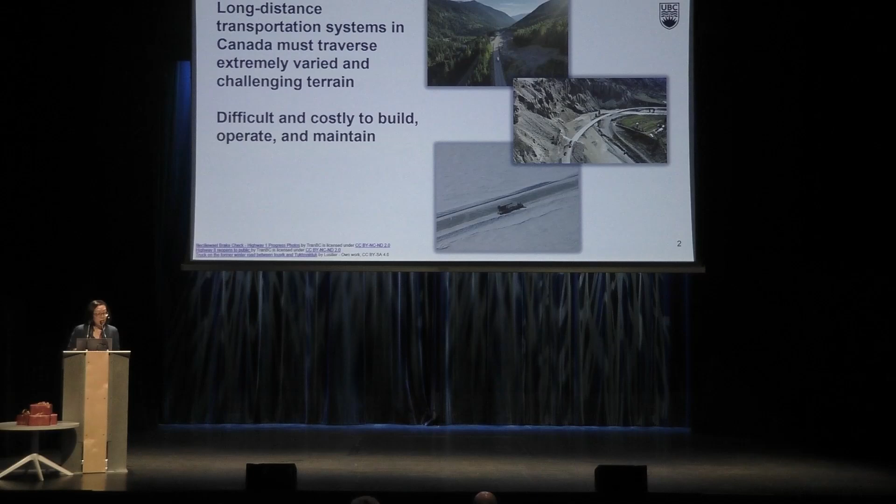And these challenges are even further exacerbated, both in the present and looking to the future. This has really critical implications for our national economy and the health of our communities, with both so heavily reliant on efficient goods movement across these systems.

All modes of the long-distance transportation system in Canada are heavily impacted by climate change. In the Northwest Territories, for example, warming trends are challenging the infrastructure and operations of airports and aviation, marine barging, winter and ice roads, and all-weather roads.

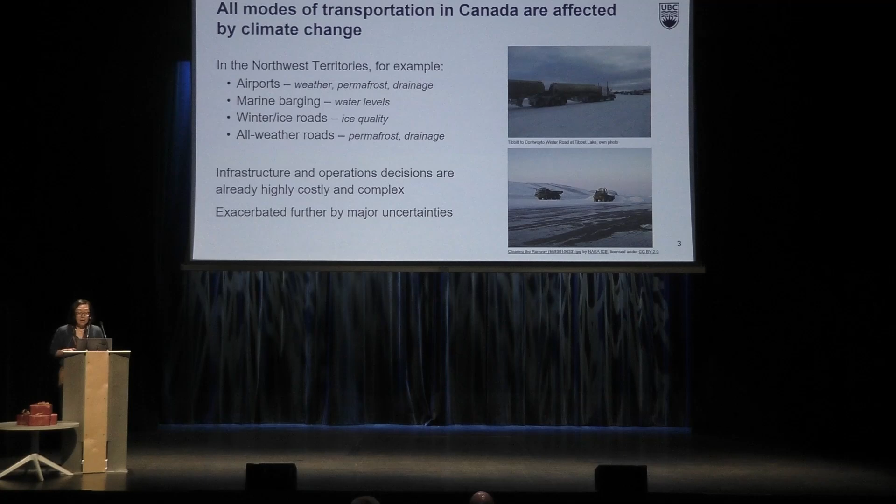Decisions regarding infrastructure and operational investments are already so costly and complex in this very remote part of the world, and they're further exacerbated by major sources of uncertainty, whether that be climate change impacts or world economic and geopolitical forces.

Climate change also means that our long-distance transportation systems are further threatened by natural hazards and extreme events that are increasing in both frequency and severity. In BC, for example, the provincial highway network is impacted by many events, including extreme precipitation and flooding, landslides and snow avalanches, and wildfires.

These events will cause and do cause disruptions to our transportation facilities, which range in impact from minor to catastrophic, and short-term to very, very long-term, sometimes in the range of years.

In BC and Northwest Territories, these transportation facilities are really the lifeline for communities as well as the natural resources economy, while in BC the highway and rail system also connect the largest and third largest ports in this country to the rest of the country.

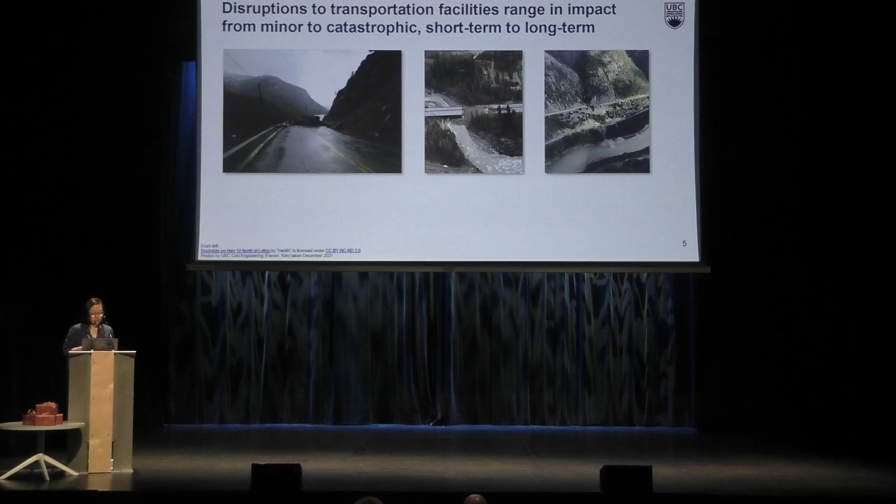So the question for me has been, how has climate change impacted our transportation systems in terms of how they operate and the costs of planning these systems?

Now I'm going to briefly provide an overview of the research I've done in these two places and discuss their relevance to goods movement. These places, the Northwest Territories and British Columbia, are very different contexts with very different challenges and different needs, and that's going to be reflected in the research approaches that I'll discuss.

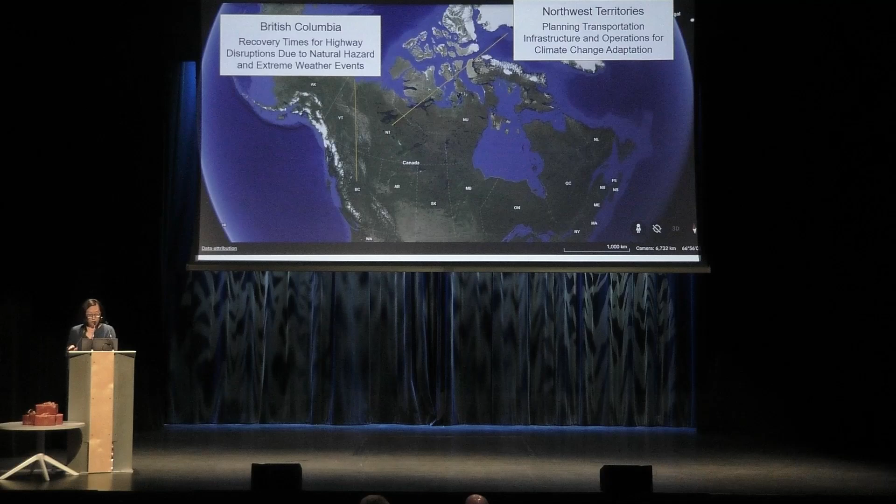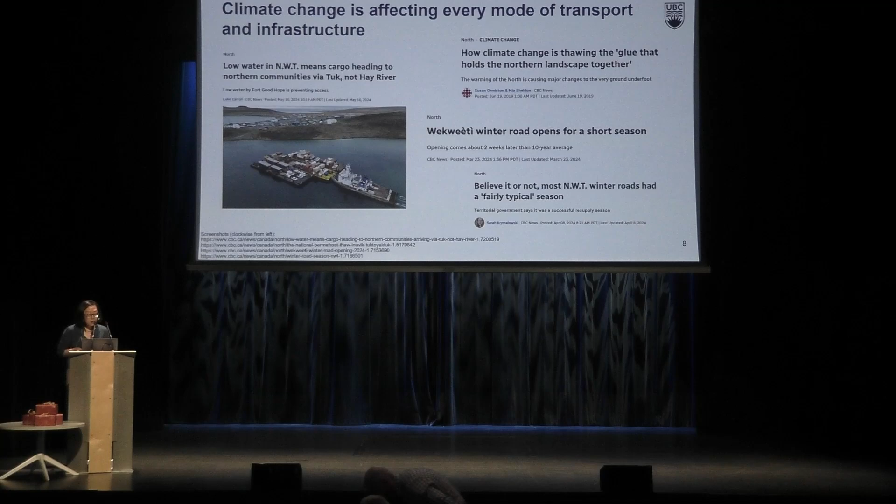So we'll start in the Northwest Territories, where my research group has been studying various transportation systems planning issues over the last decade. Climate change impacts every mode of transport there - not only the trends that come with warming, but also the increased uncertainty around what each winter or summer transport season will bring. Over the last 1.5 decades, the Mackenzie River barging system has been significantly impacted.

This marine freight transportation system operates from the railhead at Hay River, just at the bottom there, across Great Slave Lake, and then down the Mackenzie, northbound into the Beaufort Sea. This goods movement system was historically the most reliable and cheapest summer route to deliver fuel, building supplies, and other essential goods to communities along the river and to coastal communities along the Beaufort Sea.

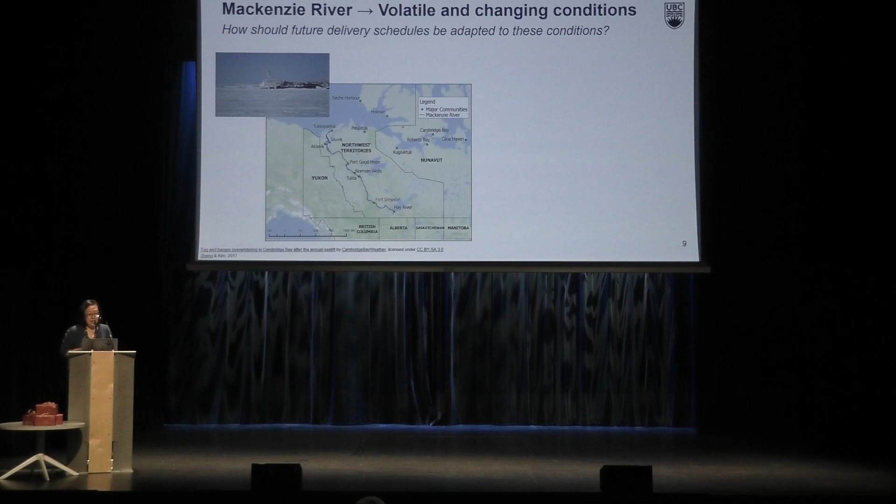Freight moves by barge in the summer and winter roads in the winter. And if not either of these, then by air, which is extremely costly because many communities do not have all-weather road access.

However, the operations have become increasingly unreliable due to changing water conditions, leading to delays, transshipment needs, and non-deliveries for the season. Speaking to one freight company several years ago, they mentioned that many are just choosing not to send by barge any longer, and instead by more expensive trucking from the get-go.

So some of the first work we did was to look at how water levels and thus barging capacity on the Mackenzie has changed, and then investigate strategies to better try to match the delivery schedules of fuel, contracted cargo, and other goods to the changing supply.

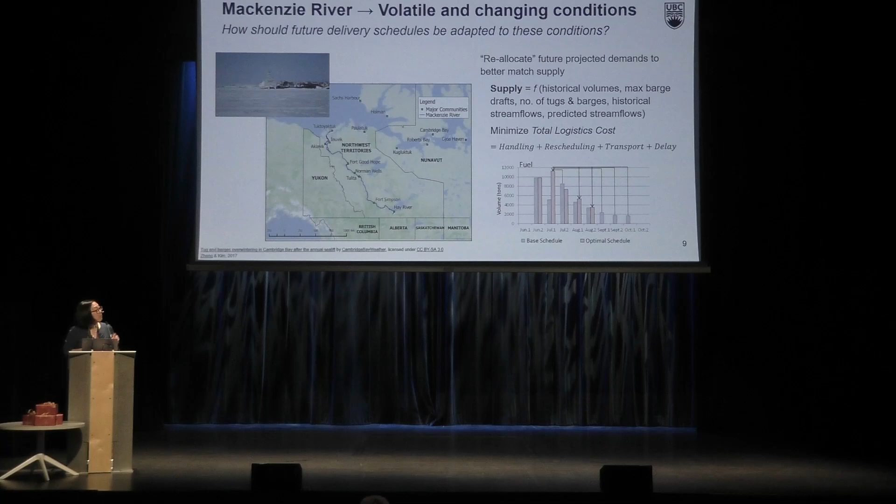But we moved on from this problem to focusing on how to handle the uncertainties brought on by climate change in terms of the environmental and weather conditions, given that transportation capacity seems to be dominated by this.

So in essence, the open season days, the window in which sailing is allowed by the Canadian Coast Guard on the river, have gotten lower and increasingly uncertain. So what we've done is used a financial options model showing that the expected costs in forecast years are much higher than the historical costs have been.

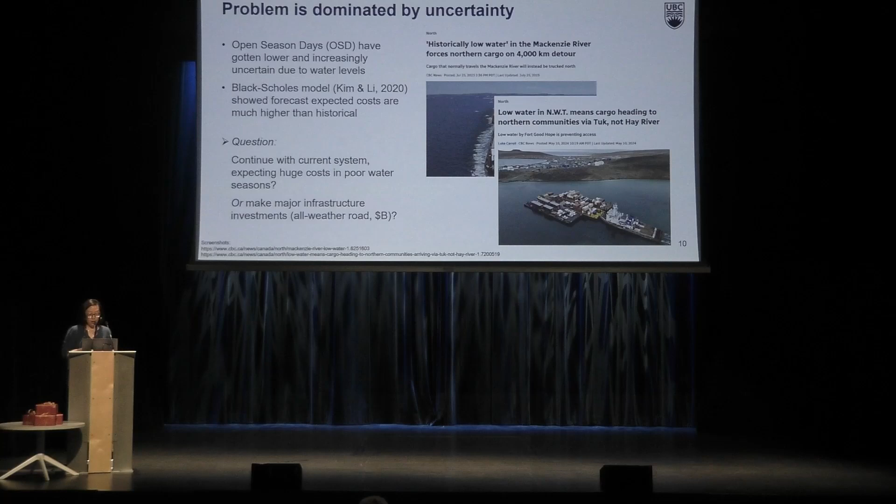This led us to our next question. Do we continue with this current system knowing that there may be huge costs in bad water seasons, also combined with poor winter road seasons, short winter road seasons, or do you make big investments to build the all-weather Mackenzie Valley Highway? And if so, when does this decision need to be made, or can there be some flexibility in when this decision is made, like a wait-and-see approach?

So we used a technique called real options analysis. It comes from the world of financial modeling to study the problem.

And we looked at the 4 construction project phases for the Mackenzie Valley Highway identified by the government of the Northwest Territories, with results leading to the staging in the order of phase 2, then 1, then 3, and 4.

So I'll make two notes about this that I think are interesting. First, these results recommend flexibility. They're not saying you have to build in this year. It's more that you want to wait and see until the year's shown, because conditions are going to change, and the model allows us to take that into account.

Secondly, the phasing actually follows what the GNWT did and has done for the Mackenzie Valley Highway. Around 21 kilometers of road has been constructed since 2018 as parts of phase 1 and 2, and there are no plans to build phase 4, which our results also support. This really has to do with the enormous costs.

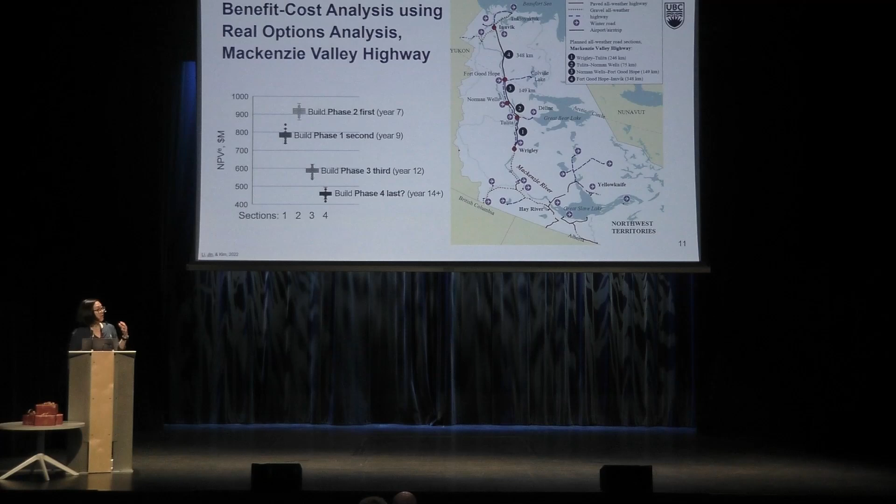Ultimately, what this work does is confirm that all-weather roads in remote areas of Canada that support both passenger and goods movement and economic development can be really difficult to justify using traditional benefit-cost analysis approaches. Our results show that the benefits of all-weather road building may be higher than the results you would see by these traditional benefit-cost analyses.

The traditional BCA doesn't consider uncertainties and the ability to be flexible about these decisions about when to invest. We show that the value of uncertainty, even if in some cases it doesn't result in a positive net present value now, it may do so in the future.

And just to close this, I found a recent study by the Financial Accountability Office in Ontario, which states the following. First, that costing climate impacts to public infrastructure over the long term is subject to significant uncertainty. That seems fairly obvious. Secondly, adapting public transportation infrastructure to withstand these climate hazards will cost less than not adapting at all over the long term.

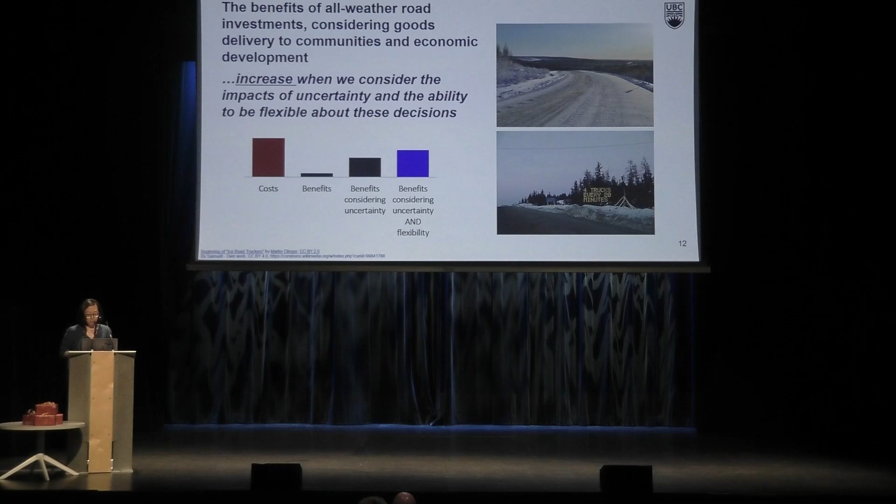All right, so that was a very, very quick encapsulation of some of the work that we've done over the last decade or so.

So next we move on to BC, and we're going to look at a very different problem here, which is the problem of disruptions.

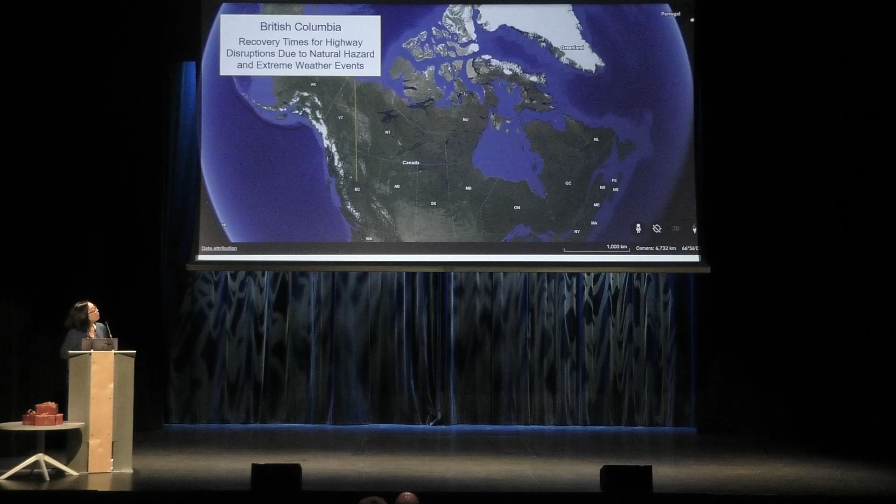So perhaps you can recall a disruption, a highway disruption that occurred near where you live or while you were traveling. And then, of course, others will have had experiences with different ones. We've had lots of experience with highway disruptions over the years, disruptions, delays, and so forth.

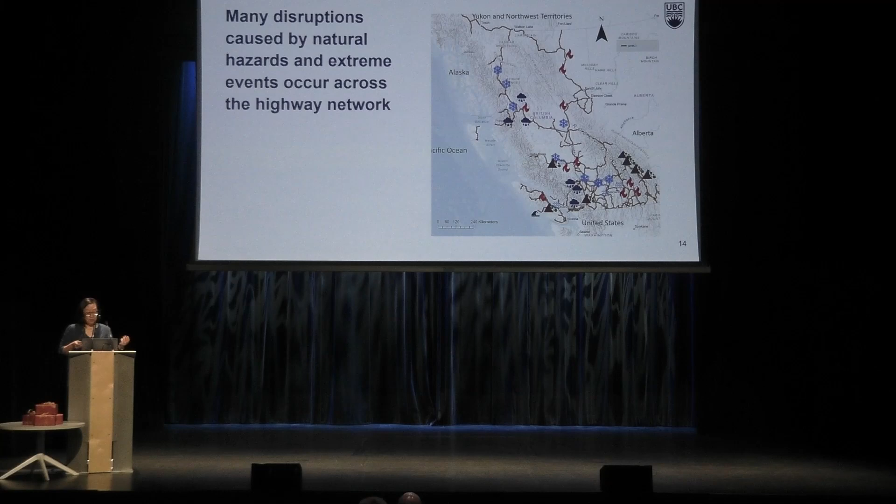There are many disruptions that occur across any highway network over some period of time. But if you're in an agency like the BC Ministry of Transportation and Transit, you want a system perspective to know what is going on across the entire system, not just individual experiences. And they want to know this in order to make decisions to improve infrastructure resilience. This is particularly important when these decisions are really expensive and resources are limited to handle what are growing problems that affect entire communities and even the national supply chain. However, the data to study this is scarce, or of very low quality and coverage.

So we turn to a rich and entirely open archived data source called DriveBC, which you may be familiar with. It's also called 511 in several other provinces and many states. 511, if you don't know of it, is a traveler information system, and the purpose is to provide travelers with information about the location and nature of any problems or issues of note on the highway system so that travelers can plan their trips accordingly.

So we use this data set, and I won't drag you through the pain of the two plus years of investigating, cleaning, searching, and structuring this data for our use. It was a messy and complex procedure. But the main thing is that we were able to answer the question of whether the data could be used to answer some interesting questions about the highway system.

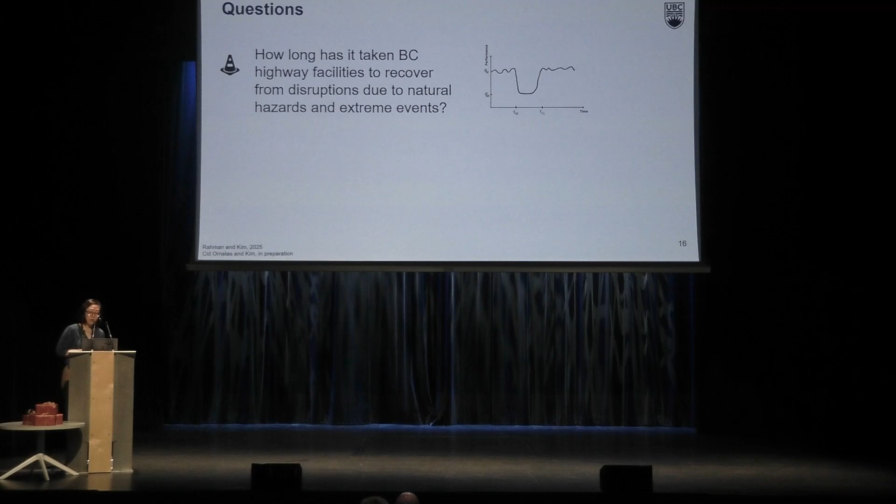The first question is, how long has it taken BC highway facilities to recover from disruptions due to natural hazards and extreme events? And secondly, what key factors have influenced recovery times? To answer these questions, we used a statistical modeling approach called a hazard duration model, and I'll briefly show you some of the main results.

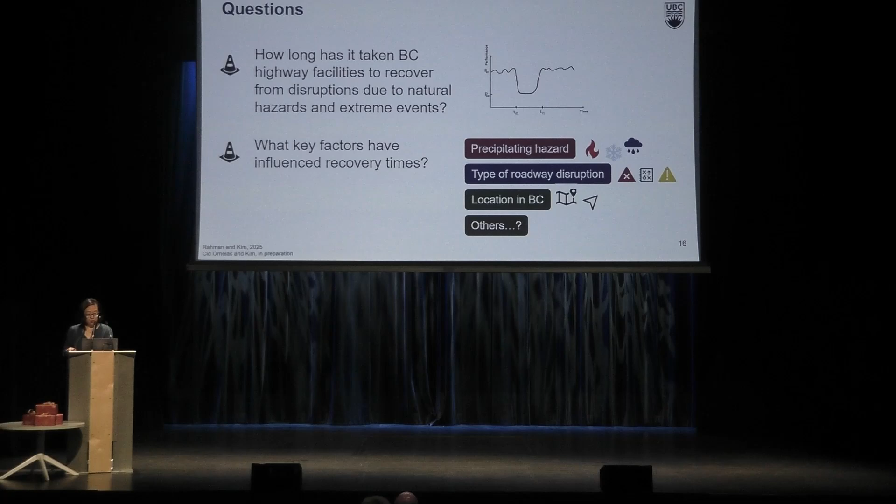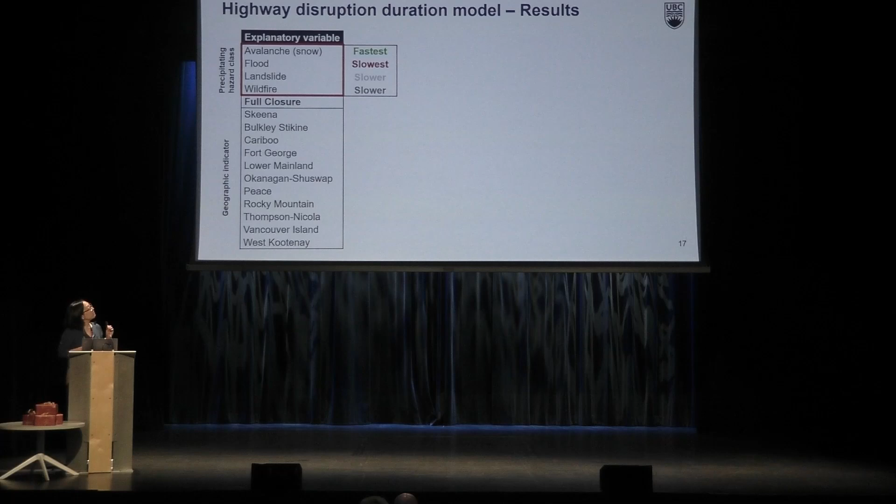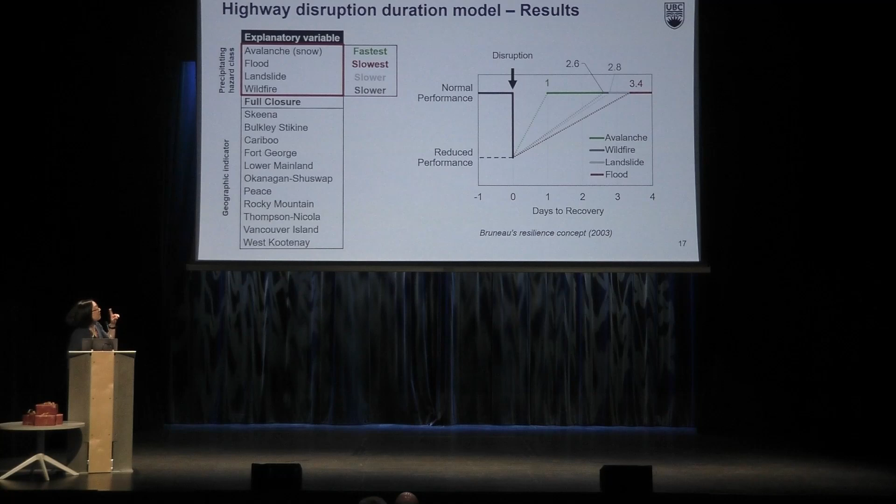We set up three classes of explanatory variables, and first, we looked at highway recovery from four classes of events. We found that the avalanche category of precipitating event is fastest to recover, while recovery from flooding events takes on average the longest, with landslides and wildfire in the middle. This figure on the right shows the relative highway recovery rates in the form of a resilience triangle, a well-known concept in the literature. So what it shows is that if, for instance, an average disruption due to avalanche recovers in a day, then it's going to take around 3 or more days to recover from the other types of precipitating event classes.

Second, we looked at the type of closure and disruption. We found that events leading to full closures took longer to recover compared to those without full closures - 1.2 days for full closure for every 1 day for non-full closure disruption. This was a little different from the descriptive analysis we had, which showed that it was actually about twice as long. So somewhere from 1.2 to twice as long.

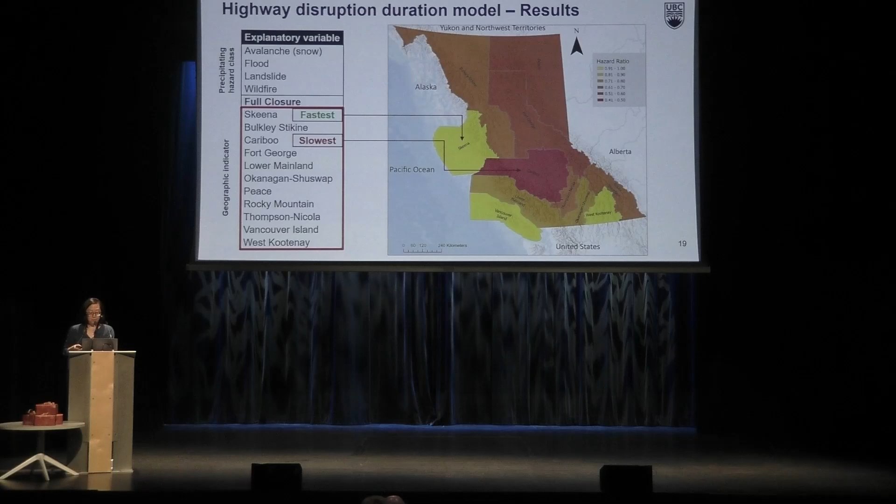Third, we found that highway disruption recovery also differs across the province depending on where you are. Very generally, recovery takes longer as you go further north. In fact, we tested several different variables that represent this geographic influence, and broadly found that as highway density and usually population density increases, recovery is faster. When disruptions occur further north, or when air temperatures are lower - which could be further north, or in the winter versus summer - recovery also tends to be slower.

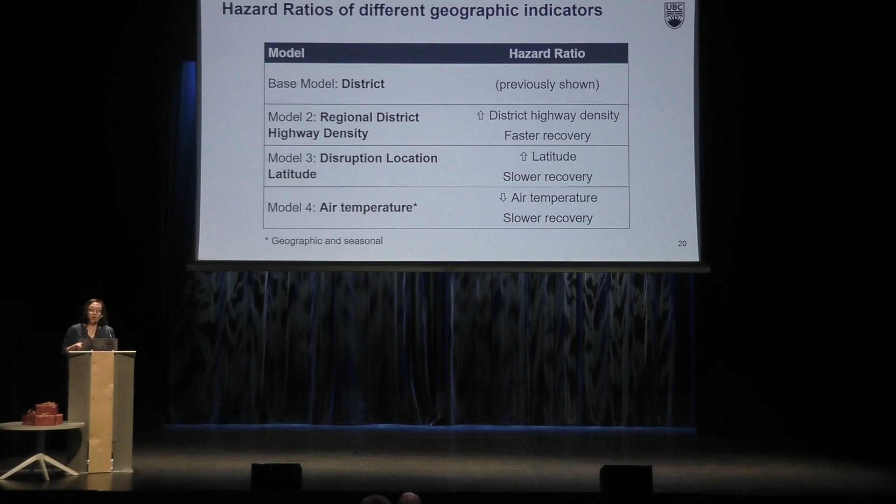Basically, this means that in parts of the province that are more remote with lower populations, recovery tends to be slower, and this makes sense because in more remote places, it'll take longer to identify a disrupted location. It will take longer to get resources from a maintenance yard to fix that disruption or address it, and possibly there's less urgency because of the remoteness. But in terms of the major goods movement corridors like Highway 1, Coquihalla, Highway 16, recovery appears to be faster and further helped by corridor improvement projects.

So this work is really a starting point to then further investigate locations with historically slow recovery. And what we want to do is combine this work with network hazard and criticality maps being done by some states and provinces, to determine where corridors important to goods movement are, and to inform infrastructure and investment decisions that improve resilience and protect major corridors important to our economy.

So that's all I had for today. Thank you.

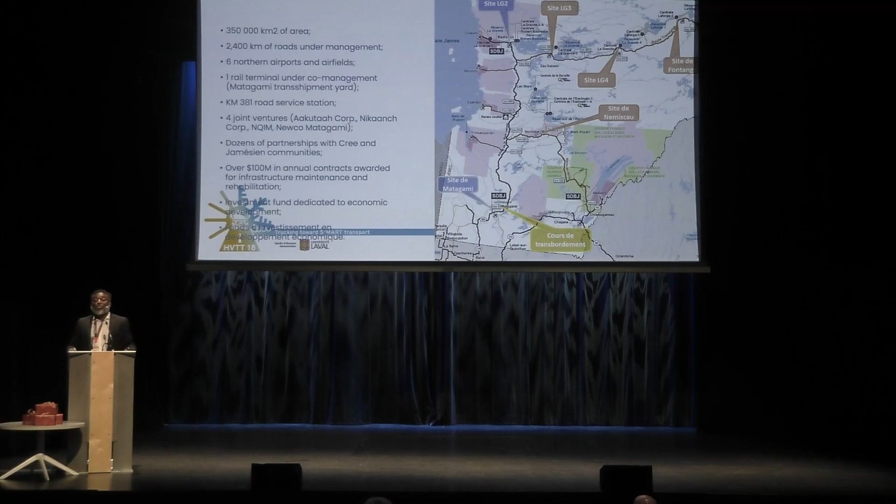We also have dozens of partnerships with Cree people, and we have 4 joint ventures with the Cree. Two of those joint ventures are very important for us: Aakutaah and Nikaanch, which is the company that manages airports in the north. So we are very connected with the people in the territory, principally with the First Nations.

We are a government of Quebec agency, a non-budgetary organization. So if you want us to do something, you have to pay - we have no budget coming from the government. We are dedicated to the economic development of our intervention territory. And what is very important is that we hold the status of mandatory of the state and signatory of the James Bay and Northern Quebec Agreement. This is very important.

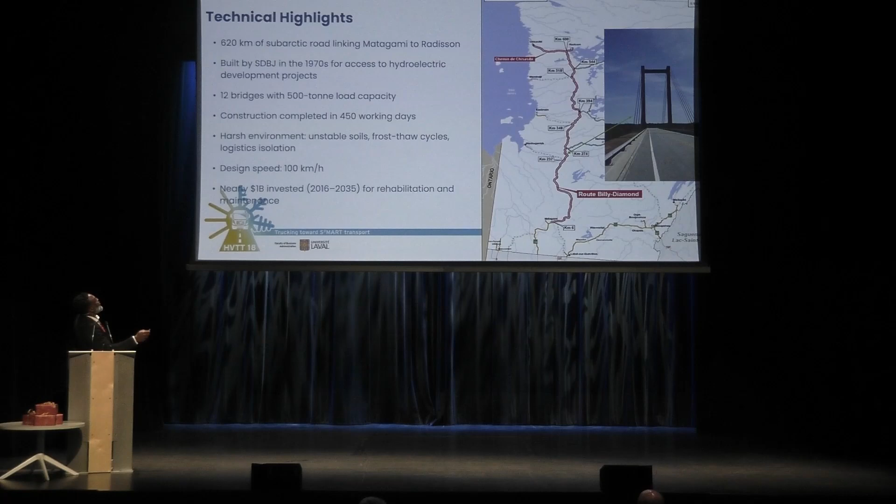Let us talk about this exceptional infrastructure. I'm going to give you some technical highlights: 620 kilometers of subarctic road linking Matagami and Radisson, with 12 bridges built to support a capacity of 500 tons. One of those bridges, very interesting, is Rupert Bridge at kilometer 257. The design speed is 100 kilometers per hour, normally used on highways in Quebec. But this road is not a highway - because it's isolated, it's still 100 kilometers per hour.

Since 2016, we started a reflection project on that road, and by 2035 we will have invested nearly $1 billion for rehabilitation and maintenance.

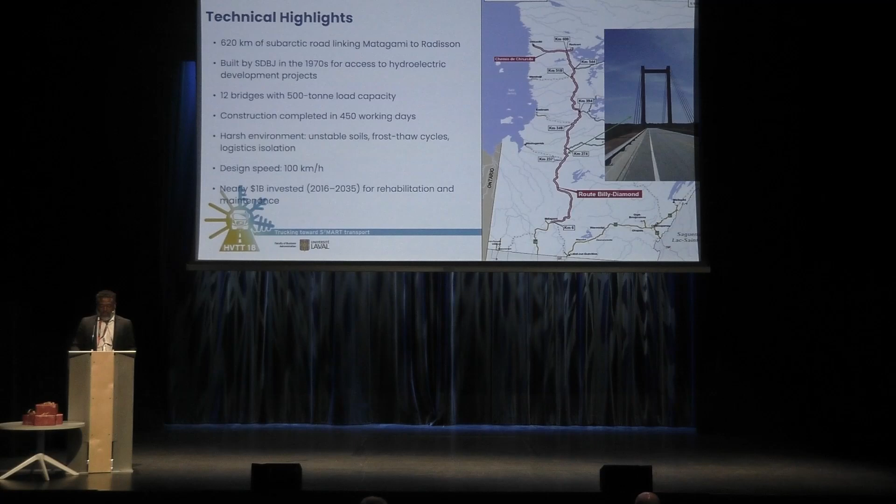It's a unique case in the north, a strategic infrastructure built on public lands under Quebec's Ministry of Natural Resources and Forest. That road provides access to hydroelectric power plants - there are many in the north. Most of the electricity in Quebec comes from James Bay. That road also provides access to all the communities on the coast of James Bay - this is a piece coming from Chisasibi, one of the important communities in the north - and provides access to La Grande Rivière Airport, the only northern airport accessed by road in northern Quebec.

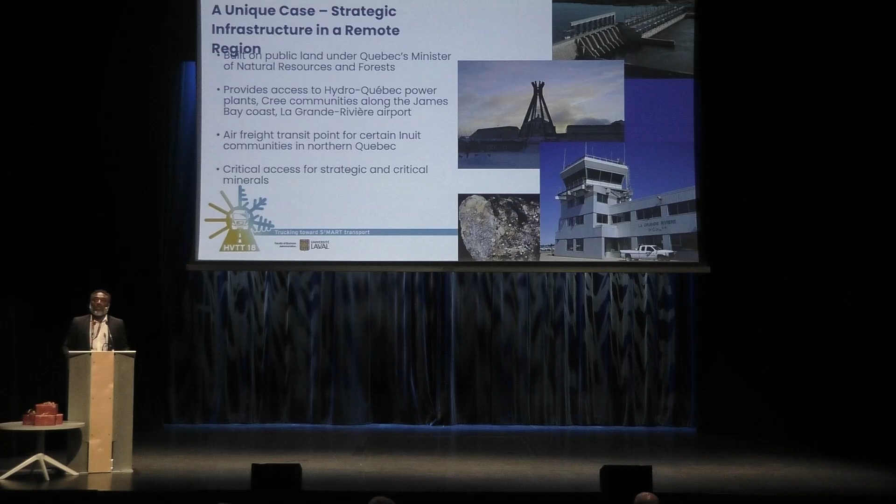Recently, we found out that Billy Diamond Highway is a very important tool for critical access to strategic and critical minerals - this is lithium. We have 78% of Quebec's lithium based in James Bay, so all the mining companies that are going to explore lithium are going to use Billy Diamond Highway.

So we have some challenges with unstable clay soil and glacial till, and freeze-thaw cycles. And you understand, because you have many trucks, very loud, we need to maintain minimum service levels while ensuring safety. It's essential to preserve this strategic asset.

We also have climatic constraints. You recently heard about forest fires in James Bay - that was very terrible in 2023, everything was closed, the city was closed. We have to face that situation. And we also have increased precipitation - sometimes we lose culverts because of the huge rain.

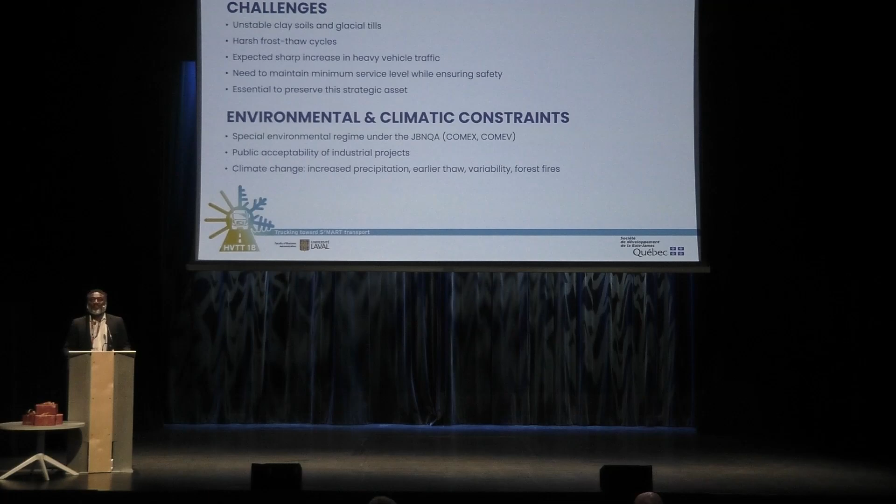So how do we manage the heavy load? We have to adapt our strategy because there's no regulation to control the heavy load on Billy Diamond Highway. No legal framework historically existed for load limits during thaw.

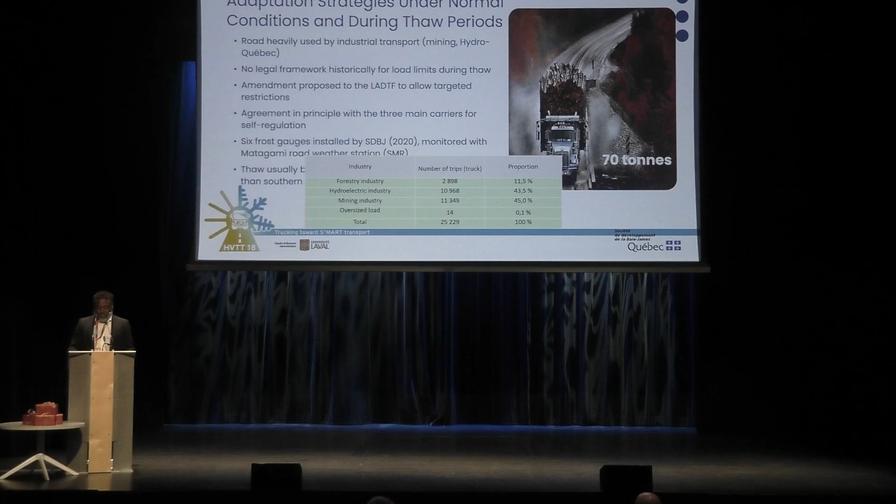For that reason, we installed 6 frost gauges in 2020 to monitor the thaw period and know exactly when it starts and finishes. Thaw usually begins in April and lasts 2 weeks longer than the southern zone 3.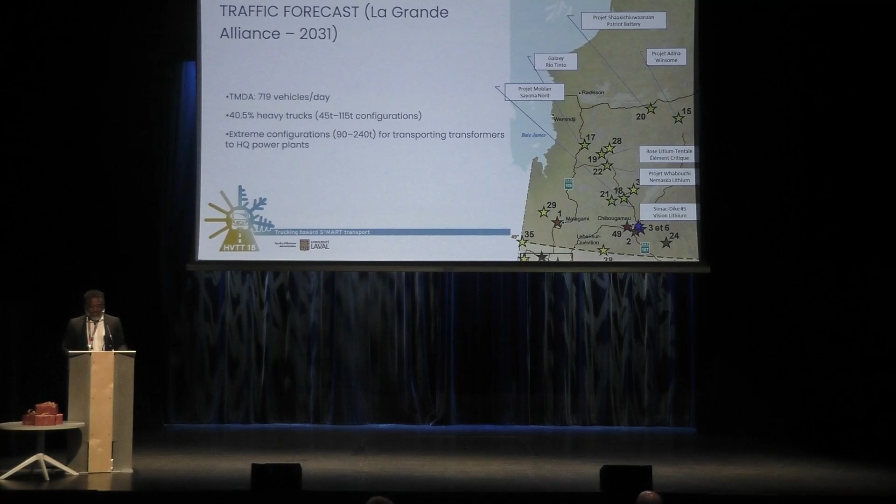A unique regulatory statute: Billy Diamond is a multi-use road under the Sustainable Forest Development Act and its regulations. Only some articles of the Highway Safety Code apply. Article 621 concerning weight regulation does not apply, so every year you can do whatever you want. There's no limitation, but the capacity of bridges is 500 tons.

But there is a regulation in Quebec for that part, so all the transporters have to ask for a permit before coming onto the bridges on Billy Diamond Highway.

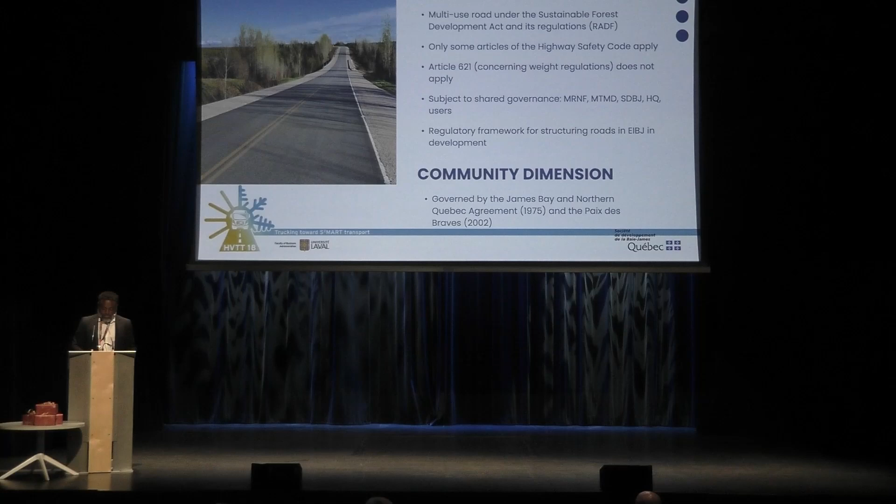Hybrid funding model is very special because normally there is no fund to take care of Billy Diamond Highway. For maintenance, the government provides funding with Hydro-Quebec, because Hydro-Quebec needs Billy Diamond Highway to reach their power plant.

For the rehabilitation project, we found funding from the federal and provincial governments, and we also use Quebec's infrastructure plan, so we have to ask every time. There's no room to just go take funding to take care of Billy Diamond Highway -- we have to go look after money every year.

Strategic corridor for northern Canada. This map is very interesting. Do you remember when I told you about La Grande Alliance? There are two huge projects coming -- I don't know when, but the study is already done. In La Grande Alliance, we are looking to build a deep water port project in Whapmagoostui and to extend Billy Diamond Highway from Radisson to Whapmagoostui.

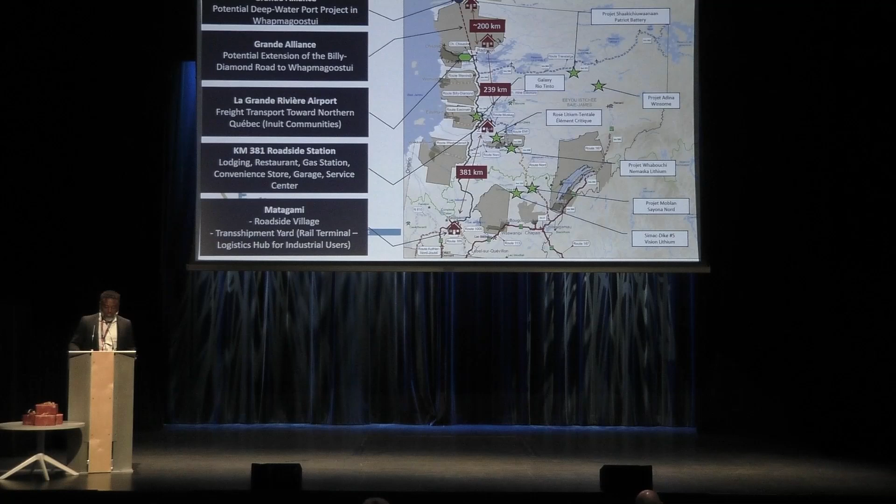For regional integration, Billy Diamond Highway connects 9 communities and several industrial hubs, as part of La Grande Alliance, as I said.

To finish today: autonomous vehicle testing opportunity on Billy Diamond Highway. Why? It's a possibility -- there's low traffic, an ideal test environment, a long linear road, few intersections, extreme conditions, a northern corridor for smart transport innovation. So we are open to any test that the transportation industry wants to do.

So thank you very much. That was a little bit tough.

Thank you so much, Emil. I think you are being very hard on yourself -- it was fine, it was all good. It was very interesting, thank you so much for this talk. Does anyone have a question for Emil? We have a little bit of time.

I would have plenty, but I will just make one. Before that, Emil, you are almost among friends because most of us, English is not our first language. Okay, mine is Spanish to start with. So very interesting, and again, like with Amy, it resonates a lot with what I do.

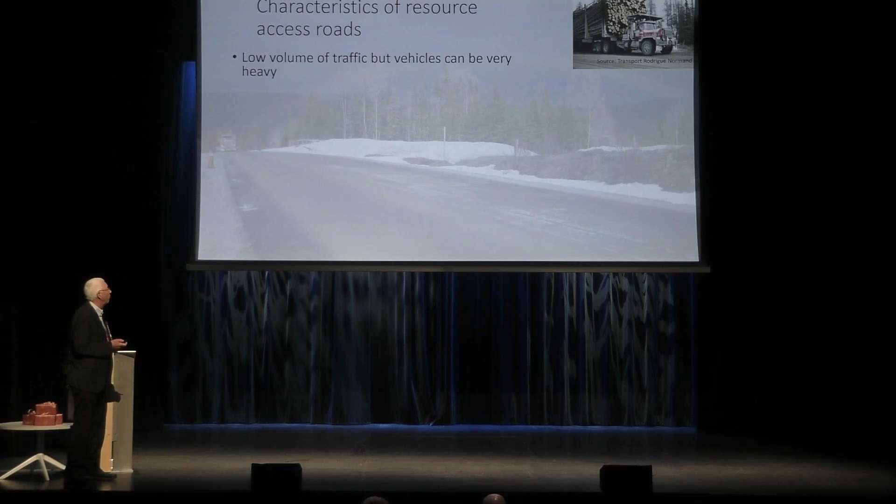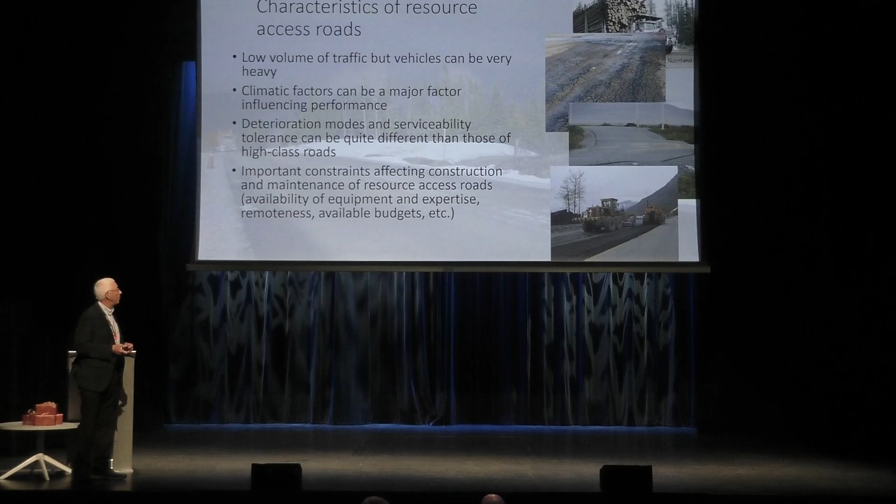Climatic factors are a major factor in the performance of these roads. The deterioration modes and also the serviceability level or tolerance we have for different types of distresses vary considerably for these roads compared to normal highways. And there's lots of constraints affecting construction, maintenance of resource access roads: availability of equipment, expertise, and the remoteness is a huge challenge.

Availability, budget, etc. So the main challenges when you're building a road - not the only ones, but some of the main ones - you need to fully understand the characteristics of the physical and climate environment of your road. You need to design embankments and pavements to provide adequate bearing capacity given generally low volume of traffic and uniform performance along the road. You need to find good quality aggregate, organize extraction and transportation for the road construction. You need to organize construction logistics, and in some cases it's really a major challenge. And then you need to maintain that road to optimize its operational capacity.

Looking at each one of these challenges - understanding the physical and climate environment of your road is, of course, a key factor to start with. The roads again are long linear structures, and by definition they'll cross all sorts of types of soil, climate, and environments. So you can go from forested lowland moist soil to highland taiga-type forest, low and in relatively dry conditions. It varies along the road, of course, with different types of soils.

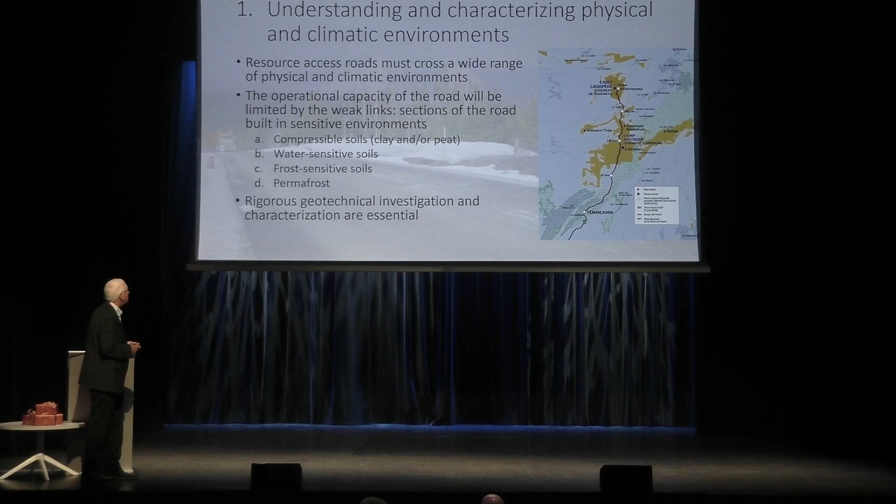The operational capacity of the road will be essentially limited to the weak links of the road. So any sensitive area along the road will dictate the capacity of the road. Among the sensitive areas that we can have along a road, we can consider compressible soils, like clay and peat. We can also consider water-sensitive soils - soils that are very sensitive to variation in moisture content - frost-sensitive soils, and permafrost.

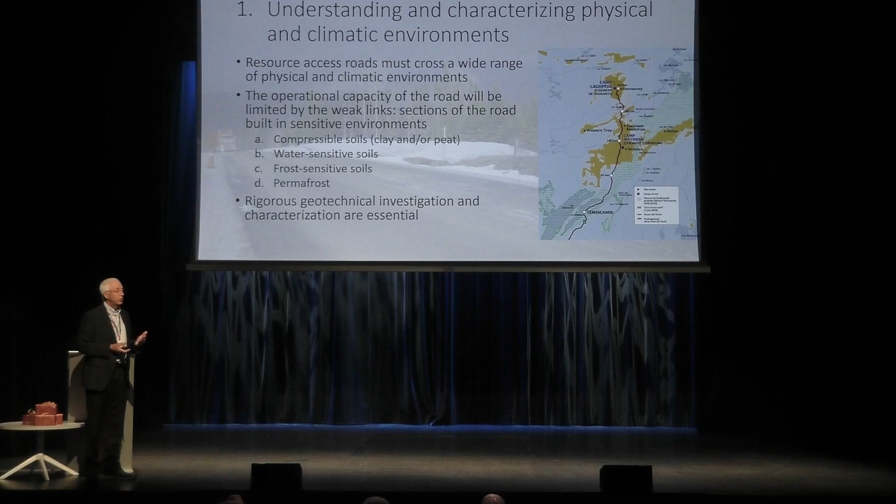You have to keep in mind that most resources currently that are attractive and that people would like to access are in the north, and 50% of the land area of Canada is actually characterized by the presence of permafrost. So permafrost now is a major concern when you're building - for example, the extension of the Billy Diamond Road will be in a permafrost area, so this has to be considered. Of course, one of the key aspects is you need to have good geotechnical information on the road corridor.

So, looking at this type of problem, like compressible soil, you can have peats and clays that are compressible, and they're very widespread in the north. So it's a common problem to have these compressible soils.

Significant settlement is to be expected in those conditions, and you need to manage the consolidation of those soils. So you need to manage the drainage of water, because consolidation involves expulsion of pore water. So you need to drain that water. You also need to manage the pore pressure inside the soil, which can lead to instability.

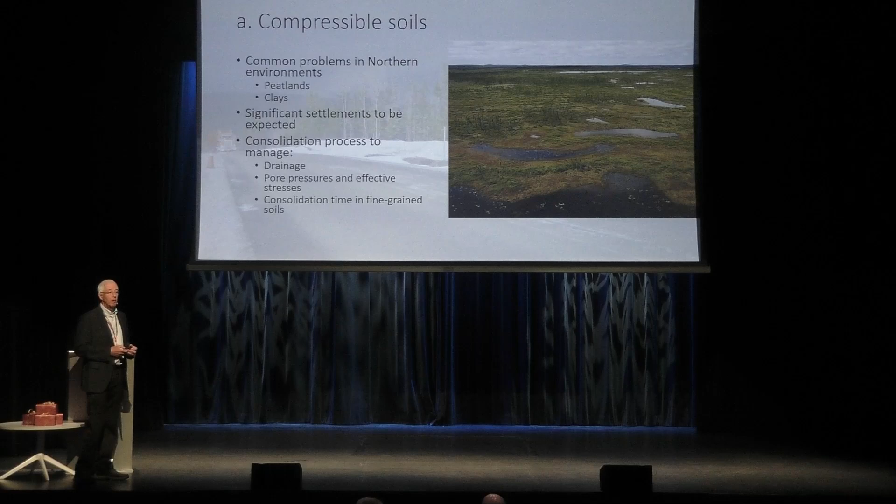You also need to consider the time for the consolidation process. So if you're in fine-grained soil like clay, it's going to take very long periods, that can be a year and even more, to fully consolidate the soil. So in the meantime, you're going to have to manage settlement and movement of the road.

In order to mitigate those problems, for clays, the basic principle is to force consolidation of the clays prior to operating the road. You can do that using surcharge or other techniques. You can also use reinforcements at the base of the embankment to help stabilize it. Or you could use lightweight material, like, for instance, if you're in a forestry harvesting area, you could use wood chip as an embankment material to minimize settlement.

For peat, excavation is an option if the deposit is thin and if you're not in a permafrost environment, because peat is an extremely important protective layer for permafrost, so you don't want to remove it. But in seasonal frost areas, if the layer is thin, you should remove it. If it's thick, then you should consider consolidation with or without reinforcement at the base of the embankment. Another option is to displace the peat using a special construction method to force it to move laterally and reach the mineral soil underneath.

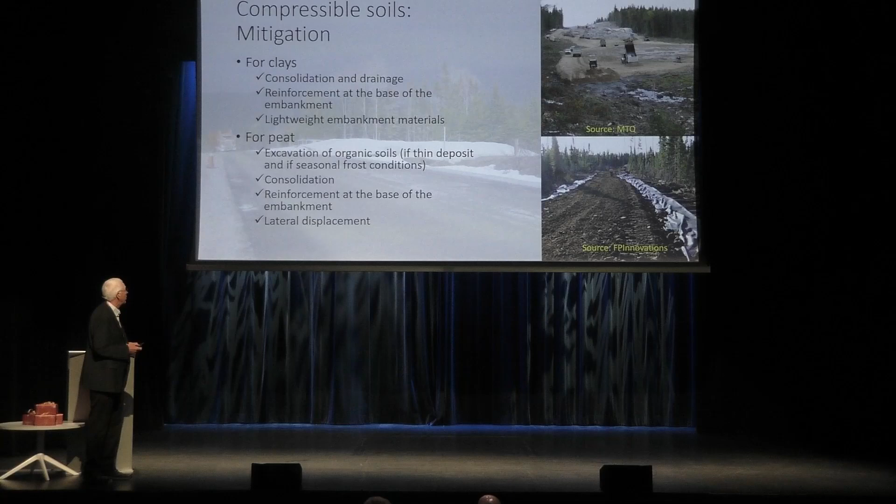Water-sensitive soil is also an important problem when you have fine-grained soil. It can cause significant problems during construction and operation of the road, and the problem is strongly exacerbated during thawing periods, whether you're in seasonal frost or permafrost conditions. If soil is thawing, you're going to have excess water and lots of problems with bearing capacity.

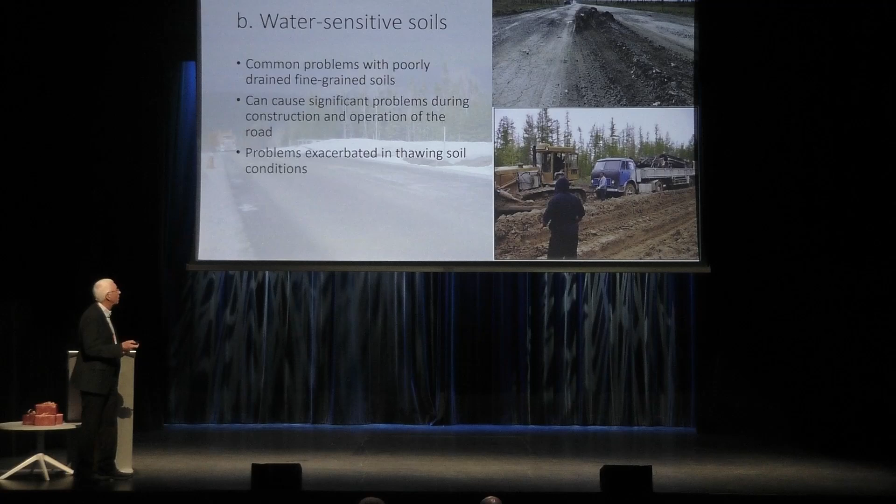The solution, or some of the key solutions, is to use good quality material first - good, free-draining gravel for the pavement and also the embankment. Good preparation of the subgrade soil: compaction, and making sure that the surface of the soil drains freely towards the ditch. Adequate drainage to remove water away from the platform. You can also use drainage composites, and chemical stabilization is another option to reduce the sensitivity to water and moisture. Frost-sensitive soil is a problem associated with the water sensitivity of the soil.

In Canada, most roads are affected to some degree by frost action. The problem can cause heave and distortion of the road surface, can be a significant problem for winter operation of the road, can cause cracks to the surface, and also causes significant bearing capacity loss during spring thaw. This problem is likely to affect the functional and structural capacity of the road during its operation.

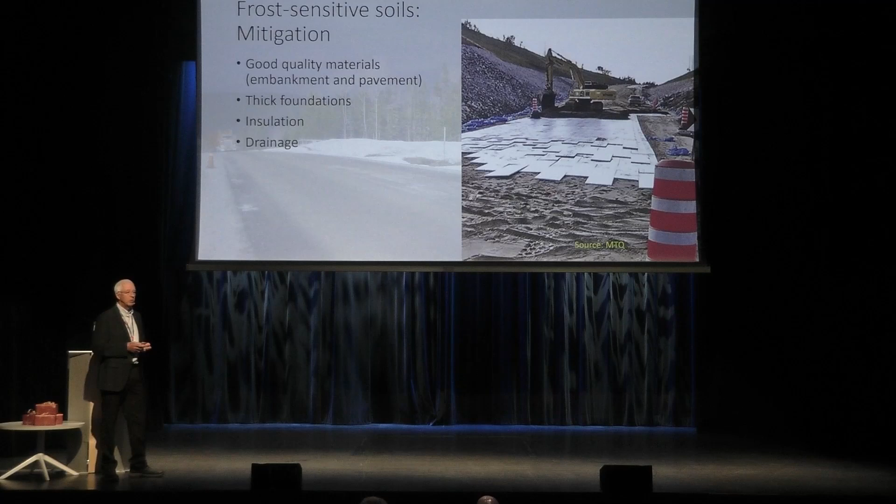Construction in permafrost conditions, again, as I said, is a widespread problem in the north of Canada. Permafrost is perennially frozen ground, soil. It's a physical environment that's in a very fragile equilibrium with the environment, and mainly with climate. So it will be stable if climate is stable, if nothing happens.

The picture on the right shows a cut in permafrost soil, an exposure created by a landslide. You can see ice wedges near the top—these are massive ice structures in the ground. I won't go into the detail of their formation, but just below the ice wedge you see ice lenses. That soil has somewhere between 60 to 70% ice content.

So as long as this is frozen, it's stable. But if it warms up, the properties change quite drastically, and if it thaws it can cause severe problems. The soil becomes extremely unstable, and that can be caused by site disturbance—if you build something on top, you disturb the surface and change the equilibrium, causing severe problems. It can also be caused by climate change, which is happening at a very fast rate in the north.

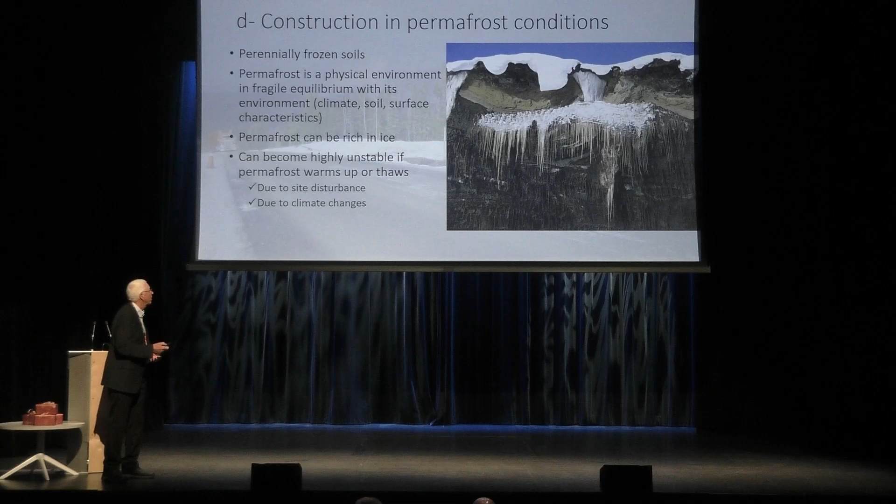Thaw settlement, differential thaw settlement, is a very common problem everywhere in the north where permafrost exists. And again, that's a management nightmare.

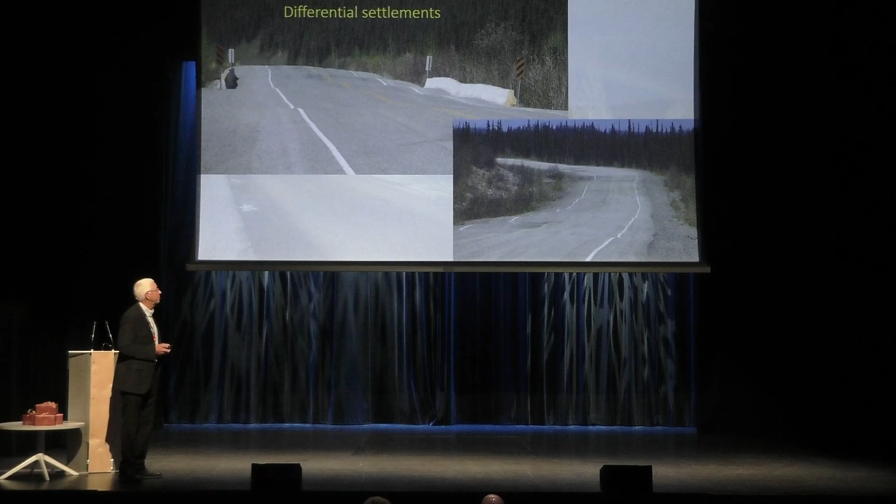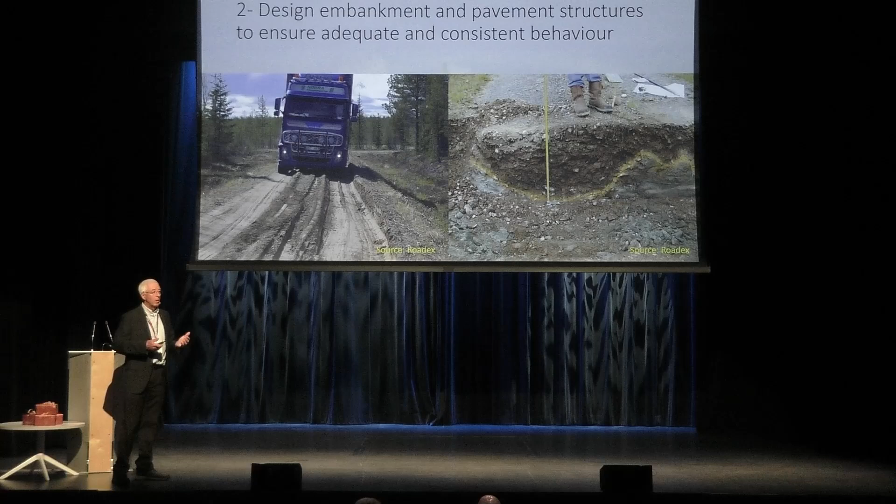The design of the embankment—you want to ensure adequate performance considering very heavy traffic. Again, we're dealing with a structure using several layers of gravel.

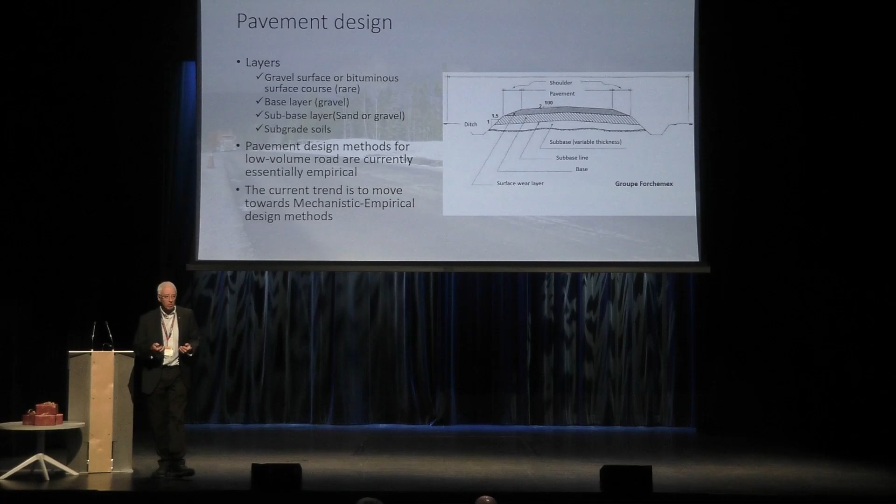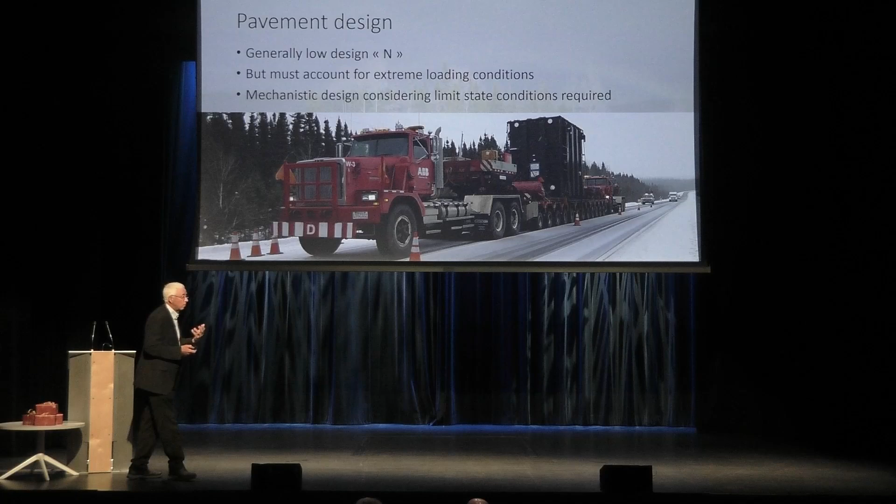Currently, the design methods for low volume roads, including resource access roads, are essentially empirical, and in some cases just rule of thumb—there's not much technology involved in pavement design for resource access roads. The current trend is to use a mechanistic empirical technique, calculating stresses and strains and comparing them to allowable values. In pavement design, you use the factor N, the number of load applications expected during the lifetime of the road, and that value is very low for resource access roads. This typically leads to minimum thickness, but you also need to account for extreme loading conditions and consider limit state analysis of your system.

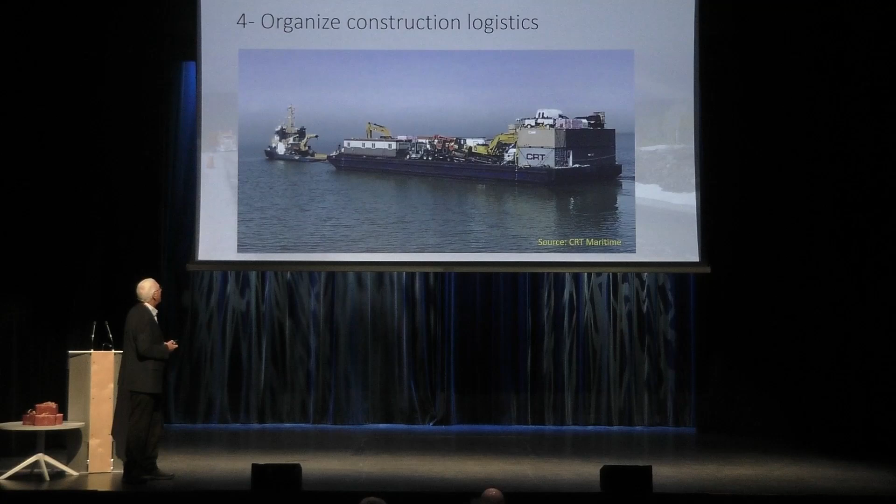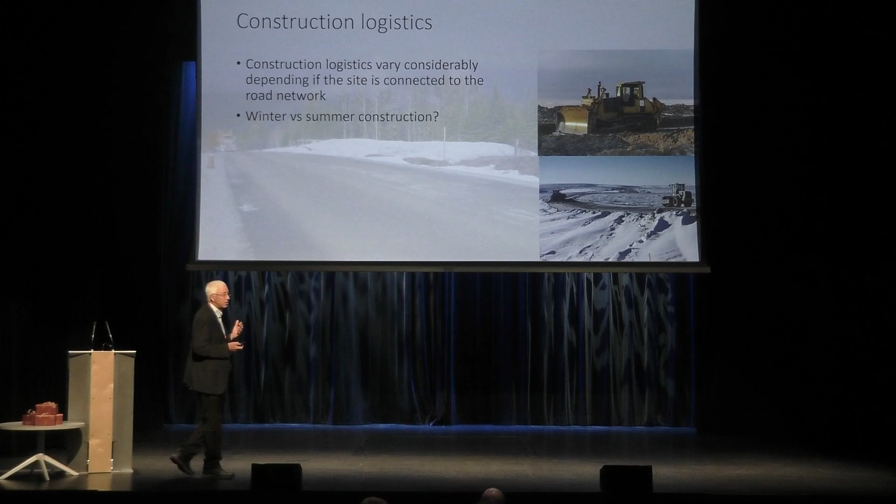Construction logistics are very complicated in the north, especially if you're not connected to a road network. If you're at the end of the road network, like the Billy Diamond Road which is connected to the network, it's relatively easy to mobilize equipment, but if you're not, it becomes extremely difficult. I have to consider winter construction versus summer construction. Both have advantages. Winter construction allows you to travel easily on the surface, but conditions can be pretty bad. In the summer, it's difficult to work, but it's relatively easy to do earthwork.

Maintenance optimization - you have to act at the right place at the right time. So the key is, again, to act at the right time, at the right place. There are different types of maintenance and rehabilitation that can be applied in the north.

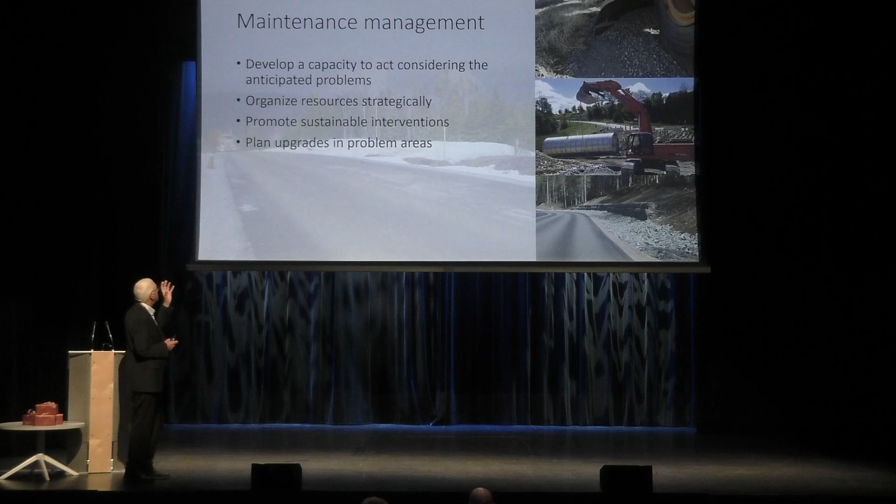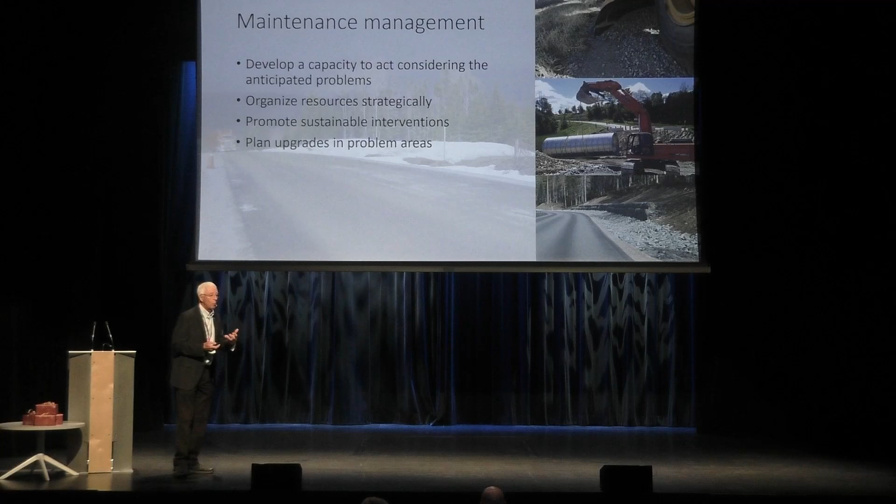Maintenance management is important. You need to develop a capacity to act considering the anticipated problem. So if you're expecting, for instance, erosion by water, you need to stock coarse material, crushed rock, to eventually be able to come and stabilize the erosion. Organize the resource strategically, promote sustainable intervention, and plan upgrades for places where recurring problems happen.

In conclusion, the resource access road is a major asset essential to access the natural resource. Yes, it's a necessary evil, but since it's necessary, might as well do it right so it lasts long and is relatively cost effective. And currently, for design, construction, and management of the road, we very often use low-end technology, and there's a need to improve that and do more research on resource access roads, using more higher-end technology.

Excellent. All right, so a little bit of background, and these are things that we've been hearing. There's continued growth of truck-dependent industries and households that depend on deliveries. There's an acceleration of extreme weather and other natural hazard events. There's aging infrastructure under additional environmental stress. We just heard about that, including bridges that are experiencing scouring with more frequent flooding events. So that leads us to the question: how can freight planners prepare for growing natural hazard risks while increasing their capacity to respond and demonstrate resilience? And especially this is true for the challenges of trucks.

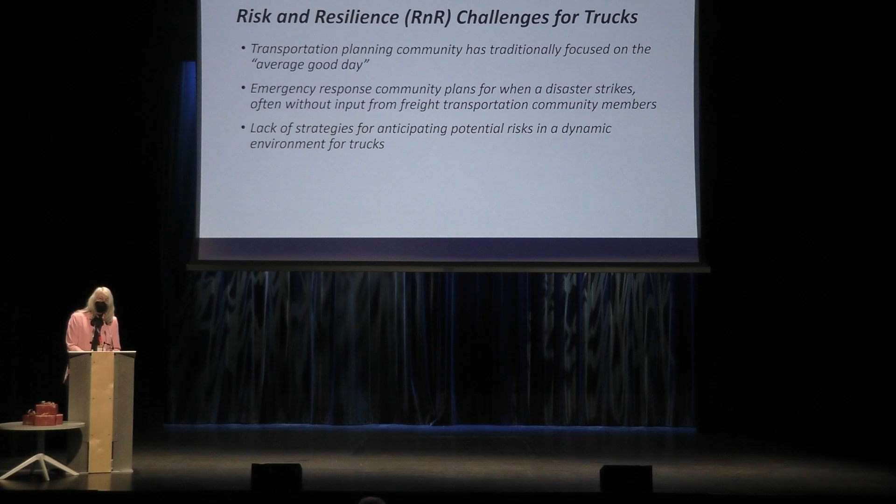And here's a couple of the reasons why. In the transportation planning community, it's been a tradition that we focus on the average good day, which means that a lot of the data about bad things happening, outliers, is not getting included in traditional analysis. And then we have this situation with emergency response community plans. Yes, they're good when the disaster strikes, but they often happen without input from the freight community planners and members of the freight community. There's also a lack of strategies for anticipating potential risks in a dynamic environment for trucks, and a lack of data products configured for the appropriate geography and conditions where trucks travel. That's probably my most important message, and we heard it earlier.

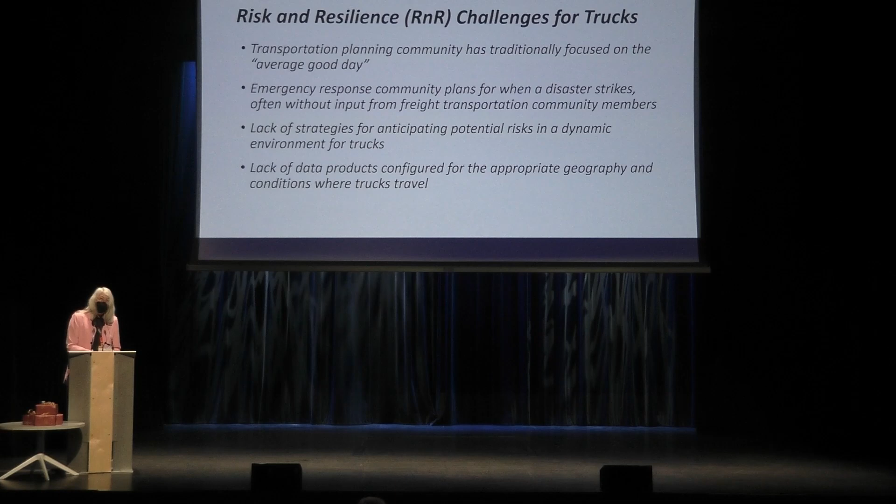It's the data, folks. All right, but in order to understand what data you need, it's really great to have a good framework, and we have one that I recommend.

This is the Risk and Resilience Framework that Jonathan and his colleagues worked on. It has 3 parts. It's got infrastructure resilience, which is the routes, adaptations, and the reduced time to return to normal operations, so getting back to business is really important. The user resilience is being prepared for change while remaining profitable and having the capacity to recover from losses. And very important is the organizational resilience, which is preparing for future events with recovery strategies, increasing your response times, and responding with strategies to maintain operations. So we want to keep this in mind.

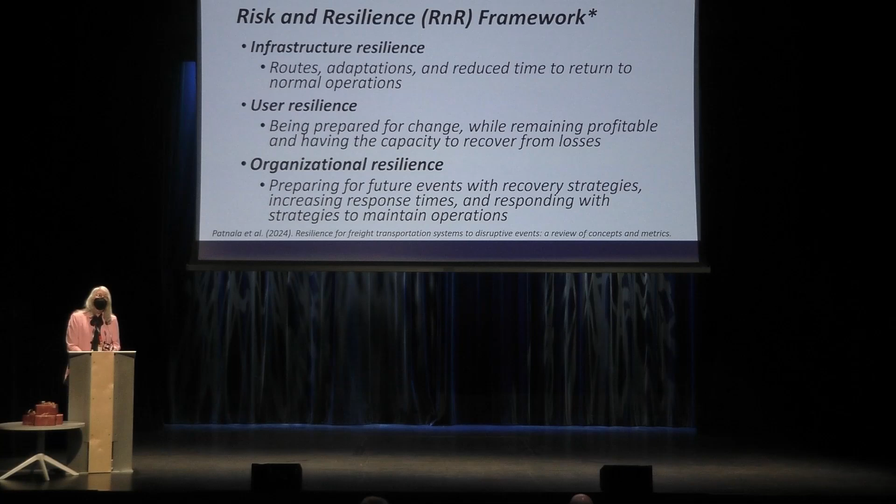We're finding that there's a lot of attention to the infrastructure. AASHTO in the United States has been adding a user resilience idea, but the organizational resilience is where we really need some help. So the state of the practice in the United States got underway in the Biden administration when, on May 5th of 2022, the Department of Transportation made the proclamation that there was going to be a new requirement for state departments of transportation to include extreme weather and resilience as part of their life cycle planning and their risk management analysis within their state management plan.

In these state management plans, most of them we think of as the Transportation Asset Management Plan, the TAMP, is where some of this information started to grow. But unfortunately, after reviewing the 50 plans that were submitted, they were really soft. They were policy language. There was little data-centric approaches that give you the scores of the metrics so you can get down to business on those segments of the road that need attention. Now, we did have a few outstanding states. One of them is Utah. The Utah Department of Transportation, they said, well, let's put together some seriousness here.

So they looked at their assets. They looked at a set of threats, and these are, they've got flooding and they've got earthquake, but they've also got some unique ones, which are their debris flows.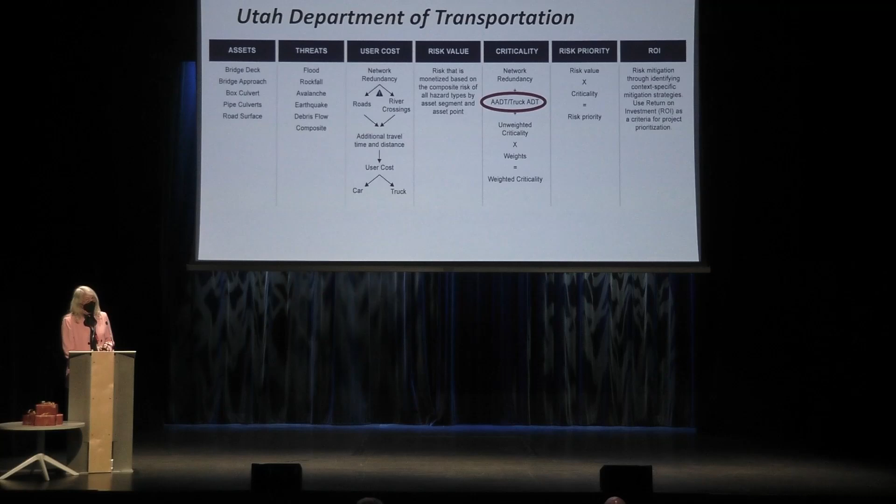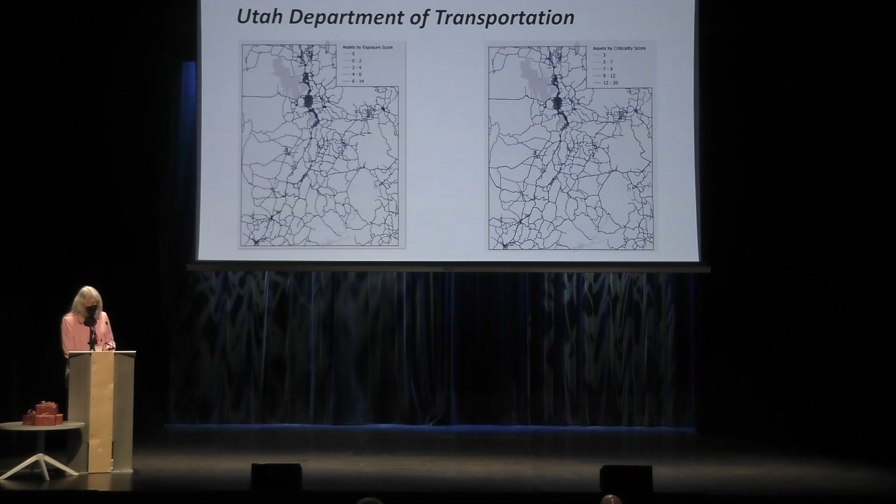But is that sufficient for what trucks need in the way of risk and resilience? So they set about working on their approach, and they're using the ArcGIS to develop these scores for their criticality and their exposure. And they're putting it all together in a story map format.

But I was looking for the trucks. And when I got to the truck AADT and it looked like we're gonna have some weighted criticality results, the work is still in progress. So we don't have an answer there as to what states will be able to do.

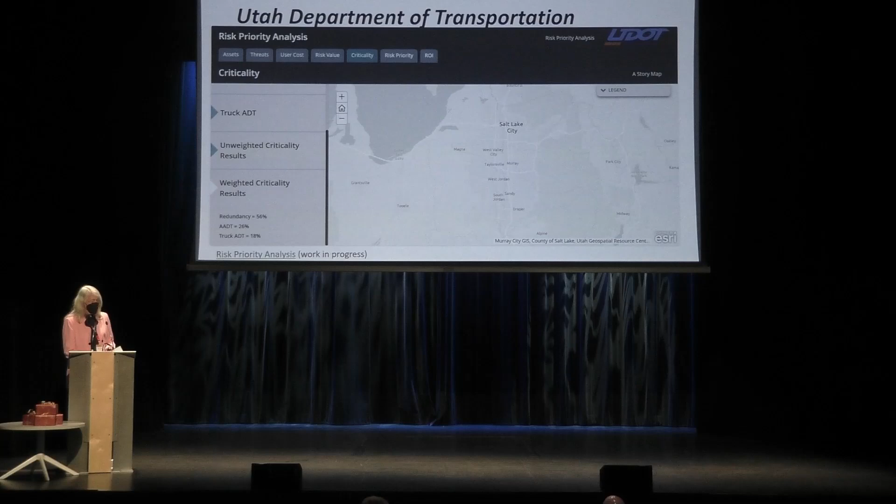And again, each state is taking their own approach. There is no uniformity yet as to how to do this. So here we have Iowa.

They took a different approach. They looked at some different factors. They do have criticality in it though. And they have trucks, but it's just truck AADT.

So when we think about all the things we've been hearing here at this conference, that seems like a pretty limited way of understanding trucks, risk and resilience.

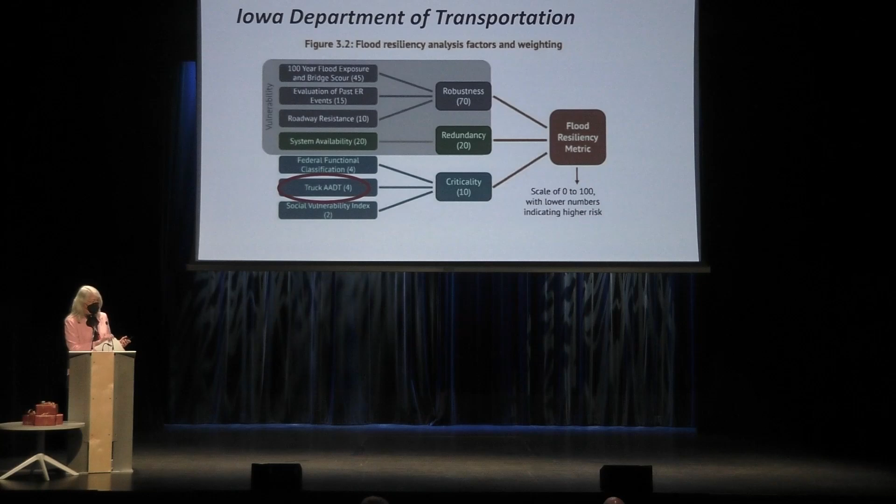So let's look at some folks that are actually looking at trucks. This is a piece of truck-focused research, and in this, they looked at truck GPS. These were raw GPS traces, and they combined that with a flood model, and they developed something that we can measure.

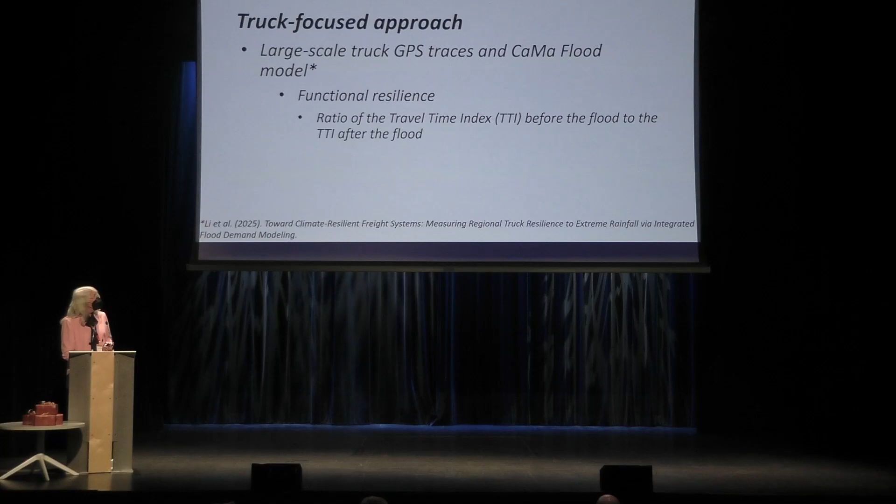So the first thing is the functional resilience, which is the ratio of travel time index before the flood event, and then comparing that to after the flood event. So that at least gives you some comparative analysis.

And they added to that a topological resilience, which is the ratio of the most connected road segments in the network divided by the total number of road segments in the network before and after the flood. But that's still not enough.

So let's see, what are these challenges to our framework? So the first challenge is that trucks, for the most part, we're thinking about trucks that are running interstate trips, and they're going to require a harmonized network that crosses jurisdictional boundaries. And we saw jurisdictional boundaries in Europe as well.

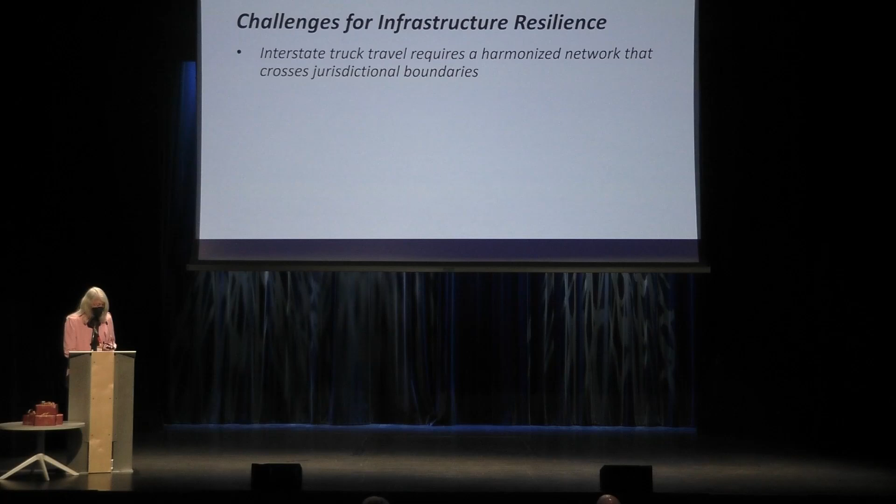And then we need a conflation technique that will append the state-specific road attributes. So each state has its own way of laying out their geographic information systems.

So I have an applied data science team, the Albany Visualization and Informatics Lab, AVAIL, and so we've been helping New York State DOT set up a platform that will allow them to conflate all of their valuable but very unique information.

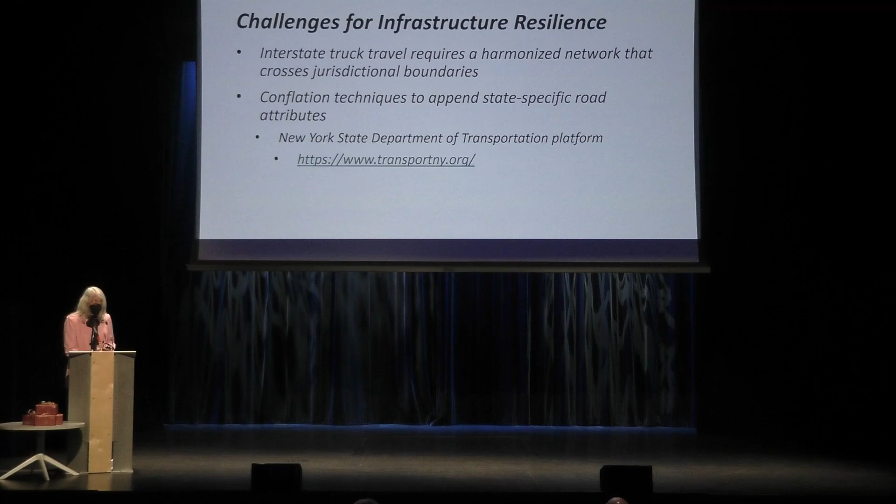The recommendation here is that everybody should think about using OpenStreetMaps as a universal base map, which we can then use these conflation techniques. This gives us real power when it comes to moving data and doing analysis across large networks.

So what about the challenges for the users? Well, here's where I'm going to say that actually commodities matter is what you're hauling. And when you go to a truck weather conference, there's always somebody who's going to talk about that van that was traveling, didn't use a climate-controlled van.

So we have in the United States, we have the commodity flow survey, but the geography is much too large. We do have traditional roadside surveys, for example, the one that was done in Washington State, the Intercept survey. Here in Canada, the Trucking Commodity Origin and Destination Survey. And then we have Transearch and the Freight Analysis Framework. However, they are model data, so we have to be careful about their assumptions.

We do have a new data product on the block called Geotab, and I think they just changed their name to Altitude. These are truck traces that have where the truck started, where the truck ended their trip, and what they're carrying. So we think that this is going to be very beneficial for understanding the relationship between what you're carrying and what's going to happen.

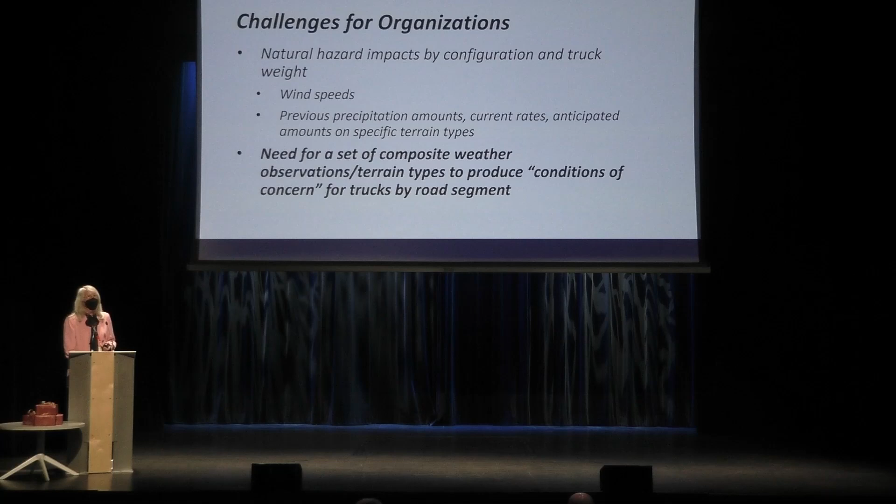So we need a set of composite weather observation terrain types, because that place matters, to produce the conditions of concern for trucks by road segment.

So now my challenge for you, the research community: pulling together what we know is happening and how we can start working towards a more resilient set of data in the future. Our data sources are somewhat at risk, and maybe more at risk than we know.

So let's think about this. What if we used our new electric and autonomous vehicles as natural hazard probes? How do we do that? Well, we're building these units because we're working on building them now.

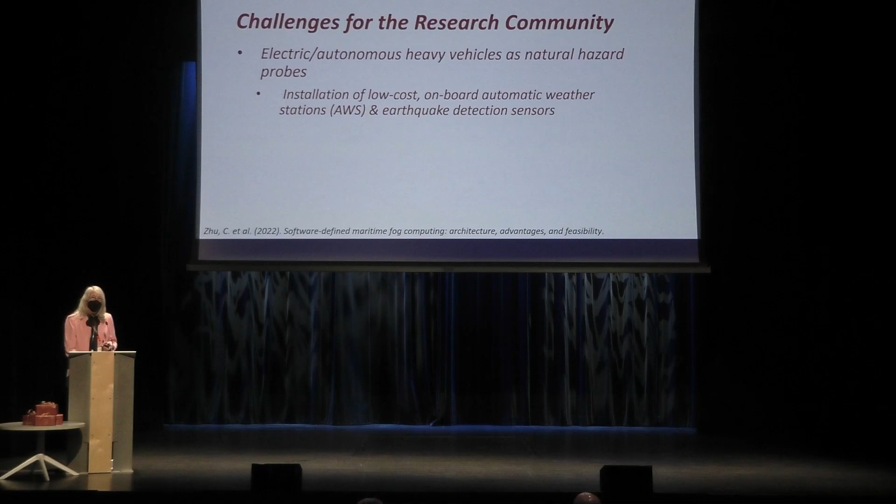How about installing a low-cost onboard automatic weather station? And if you're going to be traveling in an area where we know there's going to be earthquake activity, have some earthquake detection sensors, and then use this information through the transmission of real-time ground truth observations in a new form of computing called fog computing.

And this would allow us to have a natural hazard alert system for the fleet managers, for the multi-jurisdictional organizations, and for us, the researchers, to improve the segment level conditions and positions for the R&R plans. And the importance of this, I can't stress enough.

We have thought about computing with central computing. So this is like NOAA: give us your weather observations, we'll send it to headquarters, and then they'll send you back what that means.

We have edge computing, which I originally thought was going to be useful with putting the weather stations on the vehicles and have the computations happen in real time on the vehicle. Turns out we're learning in the maritime world that's not the best idea.

Distributed computing means that you have static locations for those communications. In fog computing, it's extremely agile, so wherever in the maritime world you have a lighthouse, a barge, a place where the data can be sent, the data can be collected, processed, the alert can be manufactured and sent back to who needs to hear it.

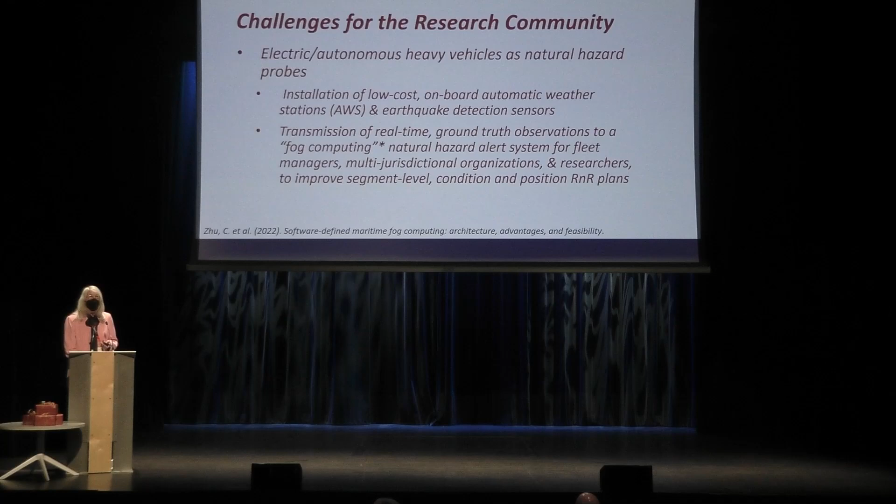So if we have a playbook, here's what we could do. We could have natural hazard events by county along the truck routes. We could have the road network analysis using the truck volumes and the road segment details. We'd have the commodities of concern and truck configurations.

We could make sure we had the management response assets in place through ITS and through the communication apps. We could have coordination upstream and downstream. And maybe we can have fog computing alert systems that can improve the accuracy of the event details.

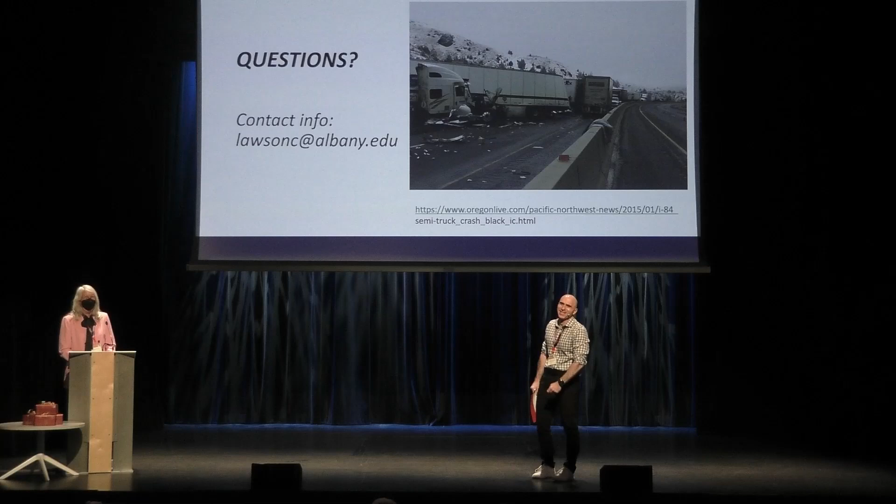Catherine, that was fascinating, thank you very much. Seems to me that we are going into a situation like a war, really. In the Second World War, the British mapped all industrial facilities, and they knew where everything was being made, so that when things got bombed, they could move production somewhere else. So it was all about planning for events.

To me it seems the equivalent now should be some models which can understand what's going on and can predict what happens when a particular area floods or whatever, how you reroute, how you shift things from one place to another in order to keep the economy moving. So is that another part of what you've done? I mean, this is the data that you need, but I feel there's a need for a model which assembles it all together and is able to be predictive about what you should do.